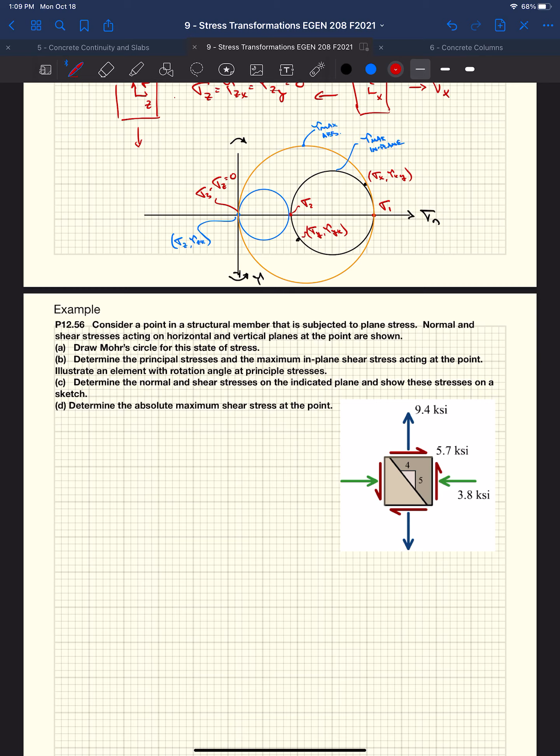Even more specific. Two, four, six, eight, 16. You made it. That's impressive.

Okay, welcome back. We're over halfway. You guys have done half the homework, half the quizzes. Essentially 25% of your final grade has already been spoken for, right? Half the quizzes you took. Each quiz is worth 5%. Homeworks are what? 30%? So 3% apiece, or 15%.

So we're getting there. We're going to continue with Mohr's Circle, hopefully finish that up today, and then we're going to start a review of what, I'm assuming, Chris Allen went through with you for statics. Hopefully Chris went through this with you, okay? What we're going to go through next with respect to beams is just a little refresher as we get into beam bending and moments and shears and shear lag and shear transfer and things like that, and stresses. So hopefully get everybody on the same page. But we're going to finish up Mohr's Circle.

So you have homework due on Friday. It's all about Mohr's Circle, right? So I need to quiz you on Mohr's Circle. That's going to be quiz number 6. It seems not cool to give you a quiz that's due on Sunday when the homework's due on Friday. Is anybody opposed to me opening up the quiz through Monday? Or are you guys just going to procrastinate anyway? You're going to do it Monday no matter what. All right, so I'm going to open it up. It'll be open noon on Friday through Monday at midnight, okay?

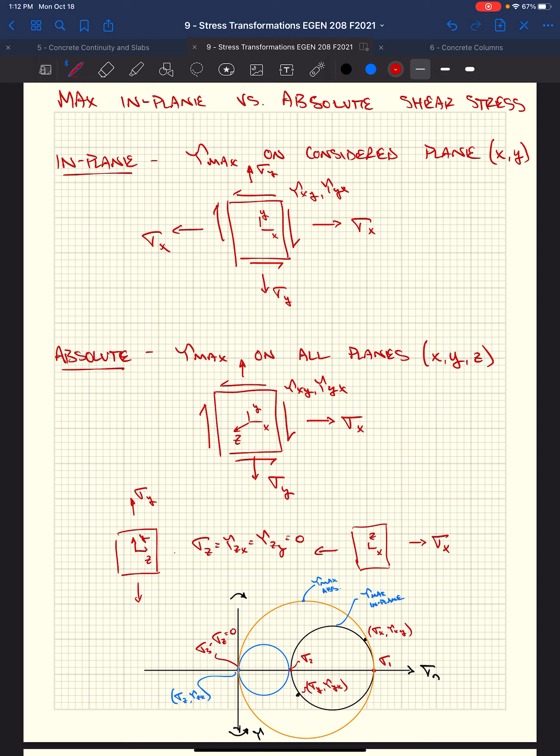Anything else? Nope. All right, so Mohr's Circle. We talked about this idea of max in-plane versus absolute shear stress and the difference between them, right? I had my box, which someone thought was garbage and threw away, I guess. Right, but we live in a 3D world and there are real stresses. There it is, and it slants a little bit.

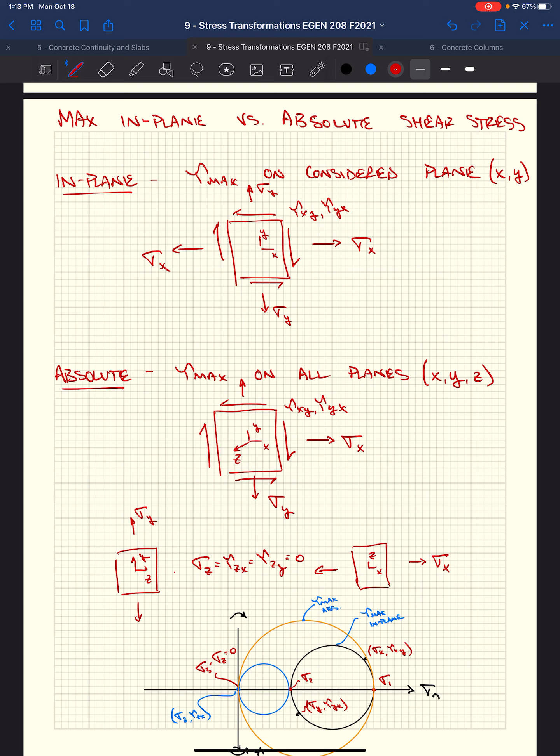Right, 3D world, we've got this stress block. We assume plane stress, so we're only looking at these 4 sides of our 6-sided cube. Well, in reality, we've got 6 sides to this cube, and even though we start by saying we have no stress on the front and back, the z faces of this cube, the fact that we have 0 stress on the z faces actually results in a Mohr's Circle for all 3 of our stress blocks, the xz, yz, and the xy. Plotting all of them together, we can get situations and conditions where we have even larger shear stress, right?

So if our principal stresses in the xy plane created this black circle here, once we consider the fact that we're in plane stress and we have this 0 normal stress acting on the faces that are facing us, we get a principal stress here at the origin, and so we end up with this larger circle, which creates a larger absolute shear stress, okay? We just want to keep that in mind.

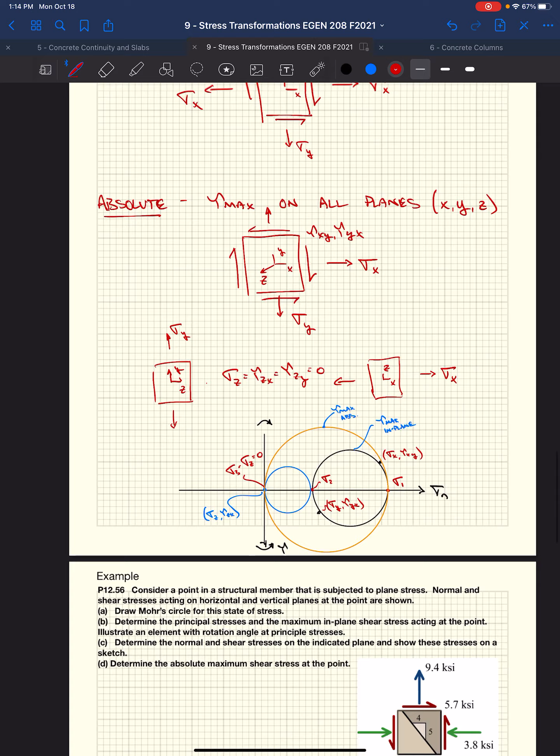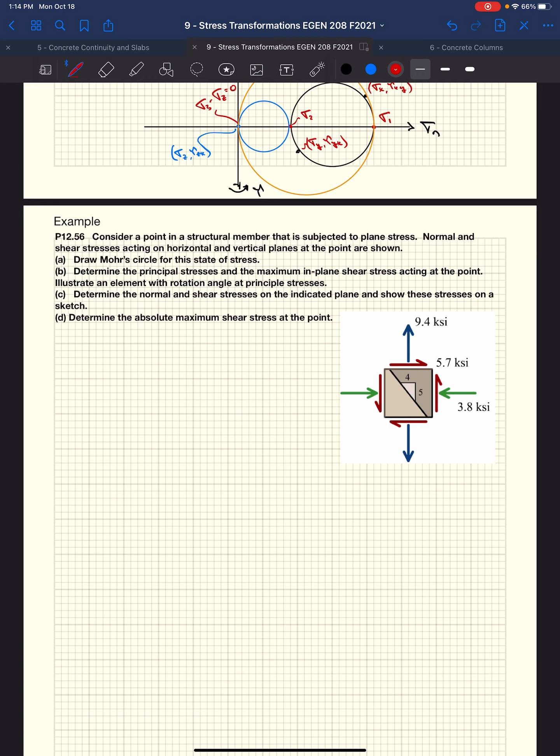Okay, so we're going to do a couple more examples. I think examples are key on this concept. So we have a point in a structural member subjected to plane stress. We know that that is a very reasonable assumption to make. We've already gone through, or someone has gone through, and established what the stress is acting on the horizontal and vertical planes of this element, oriented as shown. They want us to draw the Mohr's circle for this stress state, essentially plotting our points, drawing the circle, finding the center, finding the radius, right? We've done all of those things already. You're doing that in the homework.

We want to determine the principal stresses and the maximum in-plane shear stress acting at the point, and we want to illustrate that on an element that's rotated at that angle, right? Because we know that these aren't the principal stresses, because if they were, we'd have no shear stress. So we're going to have to rotate this some amount to get to the maximum points on our x-axis, sigma 1 and sigma 2.

They also want us to determine the normal and shear stresses at the plane indicated. So we want to know what's going on this plane. What normal and shear stresses are acting on a cube that's oriented parallel to this plane? A four to five triangle here. Then they want us to draw that on a sketch. And lastly, they want to determine the absolute maximum shear stress at the point, right?

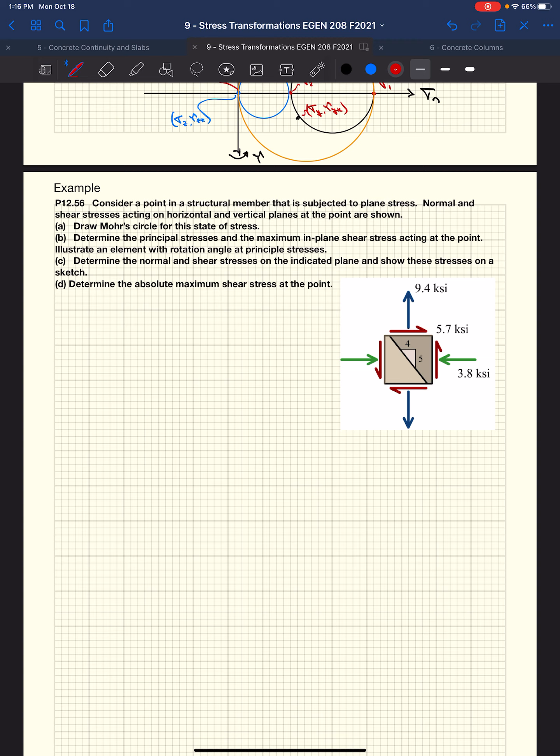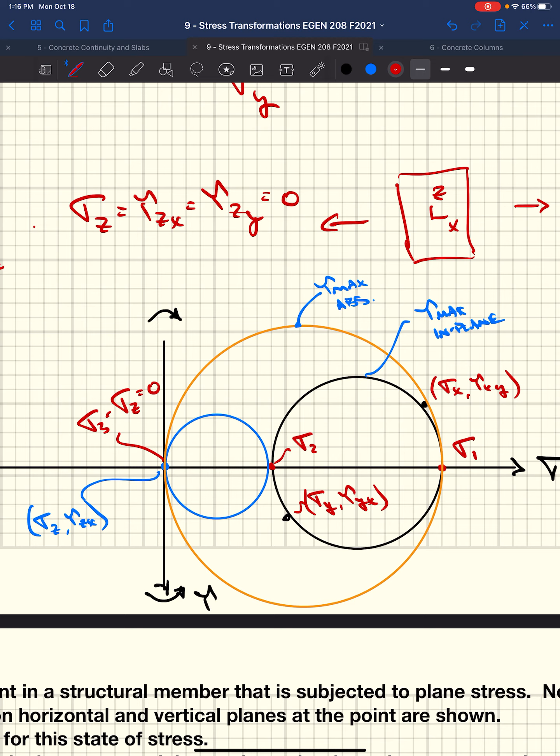Absolute maximum. So we want to make sure that we consider the fact that we have normal stress in the z direction of 0, and that may affect our Mohr's circle and our absolute maximum shear stress. But sometimes our in-plane shear stress can be the maximum. In-plane shear stress is maximum when our principal stress on the y side is either 0 or negative. Essentially, if we encapsulate the origin within our in-plane circle, then our two other circles are actually inside our xy circle. So our maximum absolute shear stress is our maximum in-plane shear stress. Those two are the same. Okay.

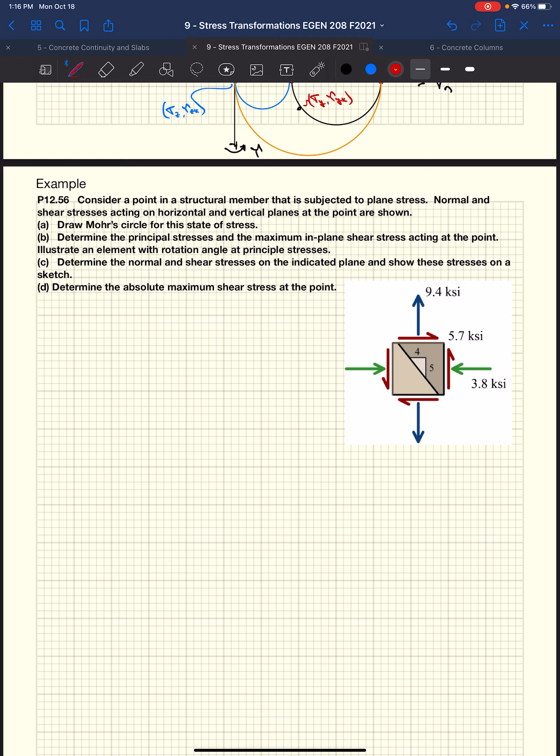I wasn't going to give this to you, but I'm going to, because I'm being lazy and we need to move forward. Okay, so in this example, here is Mohr's circle. I was going to draw it out, but we need to move ahead. This is three pages down in the skeleton notes. This is a computer-generated Mohr's circle, okay?

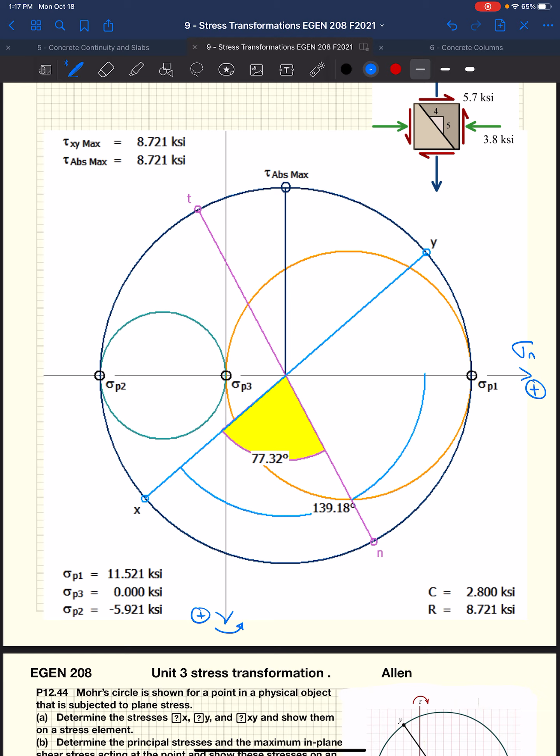So we have the indicated stresses on our stress block. On the X face, we have 3.8 KSI in compression and 5.7 KSI in shear. If we were to plot those points, compression is on the left side. This is our normal stress; to the right is positive, positive being tension. We also consider shear stress downward positive, at least that's the way the axis is drawn, with a counterclockwise shear stress on the bottom side of the axis and a clockwise shear stress on the upper side. Based on that sign convention, 3.8 KSI in compression and 5.7 KSI in shear, which is counterclockwise here.

So this is our point, our X face point. We would plot this on our diagram or graph. Then we need to plot our Y point. It's 9.4 KSI and 5.7. In this case, it's clockwise for our shear stress and tension for our normal stress. So we're way up over here, right?

Now that we have both of those points, we're going to be really interested in a couple of things. We want to know what the radius is. If we know the radius, that helps us provide a known stress state at any point around this circle. We also want to know what the center is, so that also is a critical point to help us figure out all of the points around Mohr's circle.

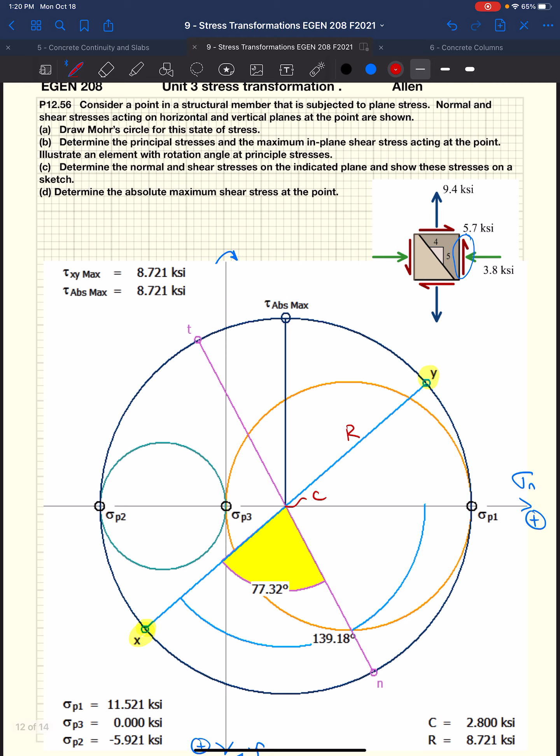So if we wanted to know what the radius is, I'm going to jump back up here, just so I didn't have to draw it and you guys didn't either. We know the radius is the square root of the x normal stress minus the y normal stress over 2, squared, plus the shear stress squared. In this case, 8.72 KSI. Pretty easy, plug it in, right? Negative 3.8. Make sure we maintain our signs. Negative 3.8, because it's compression, minus 5.7 divided by 2 squared, plus our 5.7 squared. Or sorry, 9.4. So we get a radius of 8.72, as I mentioned.

Always good to know what the center is. Well, the center is our average stress. That is sigma x plus sigma y over 2, or negative 3.8, following the sign convention, plus 9.4 over 2. We get a center point of 2.8 KSI.

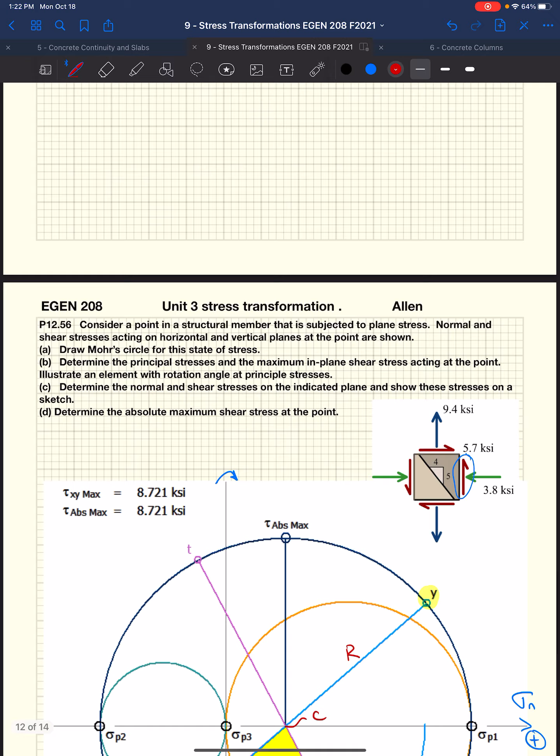So if we go back down to our drawing here, the radius in our case is 8.72 KSI. And the center point just has coordinates. The coordinates are the average stress, comma 0. Average stress being 2.8 KSI, comma 0 KSI. 0 shear stress, the center is always going to be where it crosses the x-axis, so we have 0 shear stress. So 2.8 comma 0, that's our coordinate for the center. And that would be our Mohr's circle, right? So that would be the answer to problem 1.

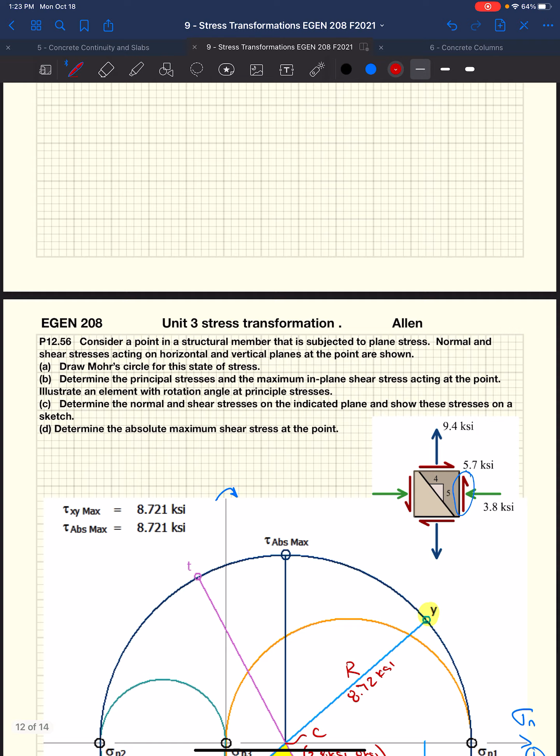So now they wanted us to determine the principal stresses and the maximum in-plane shear stress acting at the point and illustrate that on a little diagram. Well, let's go back up here. We'll call this A, and we'll say B.

So if we want to know what the principal stresses are, we know the principal stresses are where we have 0 shear stress, right? So we're trying to get to where the circle intersects the x-axis on either side. P1 is going to be sigma max. We have the center plus the radius. Well, that's 2.8 we decided was our center, plus the radius was 8.72. We get sigma max equal to 11.52 KSI.

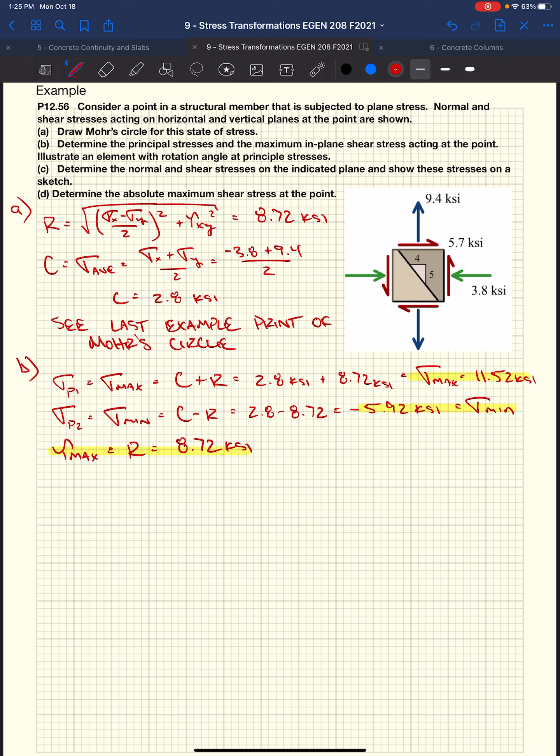Then they asked us to illustrate an element with a rotation angle at the principal stresses. Well, if we start by looking at a stress block, we have our initial stress block or stress state. We had our shear stresses. Normal stresses on the Y face were in tension. X face was compression.

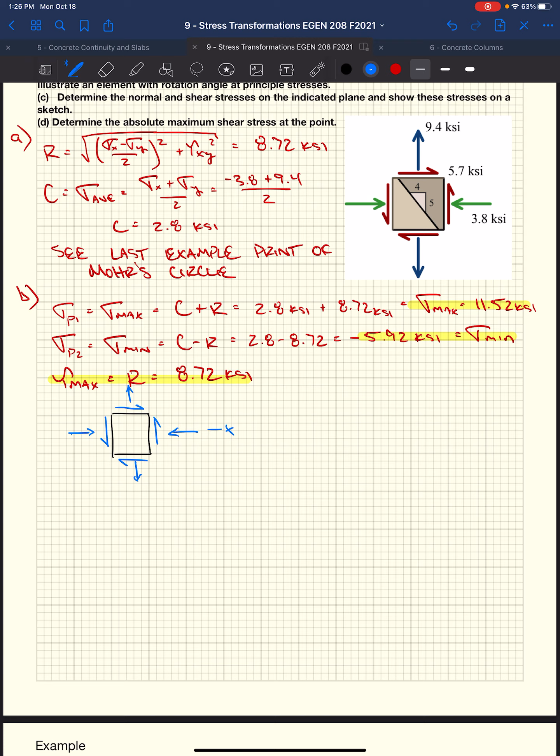Well, if we go back to our Mohr's circle, this was our initial stress state. To get to our principal stresses, we could either rotate all the way around this way or rotate back this way. If we rotate all the way around this way, the principal stresses are just going to act at 90 degrees to one another from being the other way. It's just which face they're oriented to. So I'm going to rotate this Y back down to the x-axis. I'm going to transform our Y face into this sigma P1, which is our maximum normal stress. So I really need to know what that angle is. If we called this angle alpha, alpha P for the principal axis rotation.

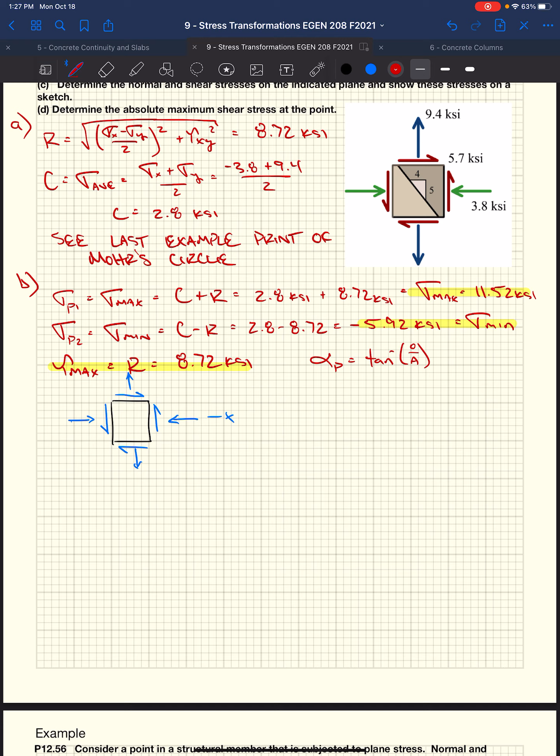There we go. All right, so we need to know what alpha P equals. Well, alpha P equals the inverse tangent of the opposite over adjacent, right? If we go back and look at our inverse tangent, this will be opposite over adjacent. So we need to know the magnitude that the Y point is above the x-axis. Well, that's easy. That's our initial shear stress, right? The adjacent, well, that's the normal stress that's beyond the center, right?

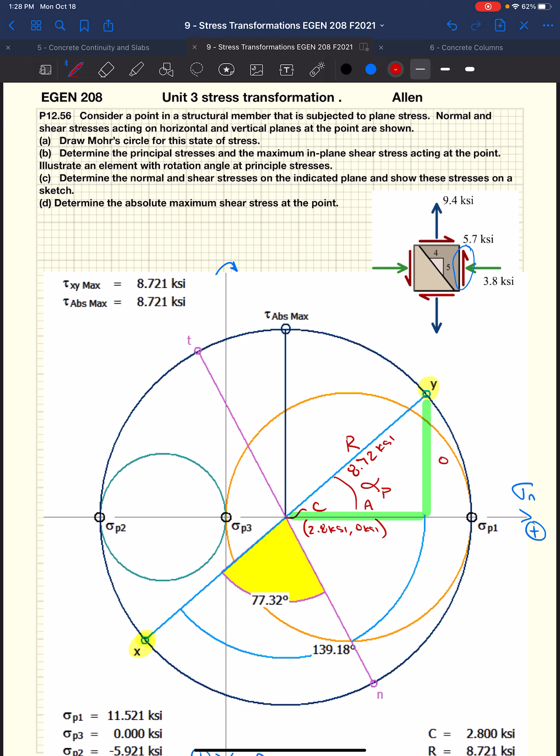So we would essentially need to grab this coordinate, which is 9.4, minus the center coordinate, which is 2.8, and that'll give us our adjacent, right? And then we can do our inverse tangent. So we know that this is the inverse tangent of 5.7 over 9.4. That's our x coordinate of our y point, minus the center, we know we have to take away the center in order to get that adjacent leg. If we do that, we get a sigma p or alpha p of 40.8 degrees.

We also know that that's in Mohr's circle world, right? Mohr's circle world is twice that of the real world. So if we rotate 40.8 degrees on Mohr's circle, we really rotate half in the real world. So theta now equals 20.4 degrees. So this stress block, in order to figure out what the planes are in which we get our principal stresses, we need to rotate this block 20.4 degrees. And then the sides of that rotated block are going to have our principal stresses, right? The maximum normal stresses we're going to see in our block.

So I will just draw a line like that. Right, this is 20.4 degrees, because I rotated down. There's my stress block. Those are my axes, right? We had a Y face and an X face, like we had in our normal block. Now those have rotated down, as you can see there.

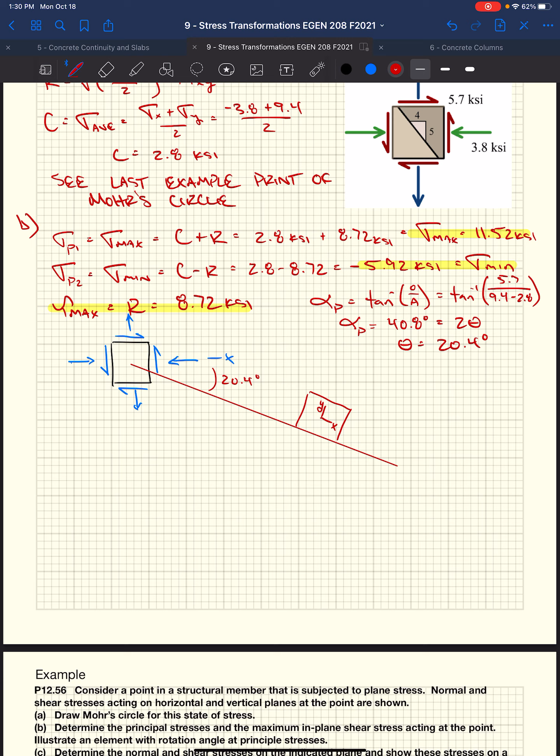Well, now if we look back at our circle, it's our Y face that's going to have our maximum tension stress, right? And our X face is going to have our minimum stress, which is actually a negative stress. So I just want to make sure that I populate the stress block right. So the X face should actually be negative. What does that mean? That means it's in compression. So 5.92 KSI. And then our Y face, well, that's our sigma 1 or our maximum principal stress, which we decided was 11.52 KSI. And that's part B.

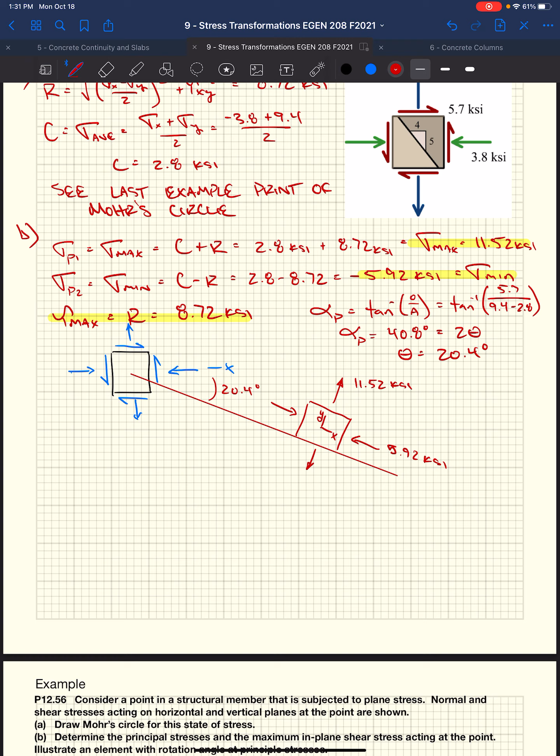We figured out the maximum in-plane shear stress, 8.72. We figured out what the maximum principal stresses were, and we drew a block that indicated the planes in which those stresses act. Right? So if we took whatever material this was and sliced it at a 20.4 degree angle, this face here would have 5.92 KSI in compression. It'd be the worst case compression stress. If we sliced it 90 degrees from that, we would get the worst case tension stress, or the maximum stress.

Part C, they were specific in asking us to look at what are the normal stress and shear stresses on the indicated plane, and show them on a sketch. So obviously, in the real world, you would be able to analyze an existing condition, right? Like we've done before with external forces. We got shear stresses for a stress state. Now, obviously, there's a plane of interest in this material or this element that they want us to know what are the stresses acting on that plane. Maybe there's a connection that's oriented in a 4 to 5 triangle. Maybe there's a weld that's welding two pieces of steel together at this angle. And we want to know exactly what the stresses are acting across that joint so we could design that or at least check its capacity.

Well, first thing we want to know is, what is that orientation? What is that theta, right? We have an orientation here. We want to know what's the new orientation that we're trying to figure out these stresses. So theta, a lot of inverse tangent here. I know you guys love trigonometry here.

In order to get that angle, we could use the inverse tangent, opposite over adjacent. Opposite being 4, adjacent being 5. We can figure out that angle is 38.66 degrees.

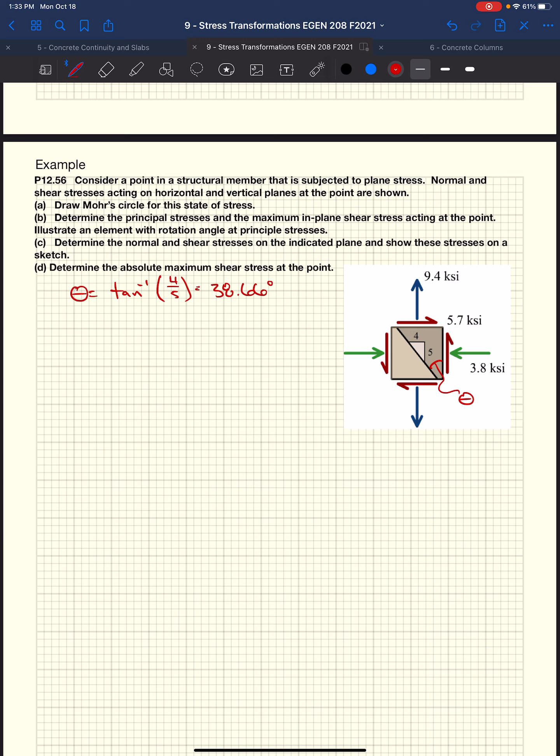Well, knowing that we're now going to be rotating this counterclockwise 38.66 degrees, this is where we can go back to Mohr's circle that we've already established for our known stress state. We've got our two points, and we know that now we need to rotate 38 degrees to the left to figure out the two new points, because these are going to be our stress states on the x and y face, or this face and a face perpendicular to it of that element.

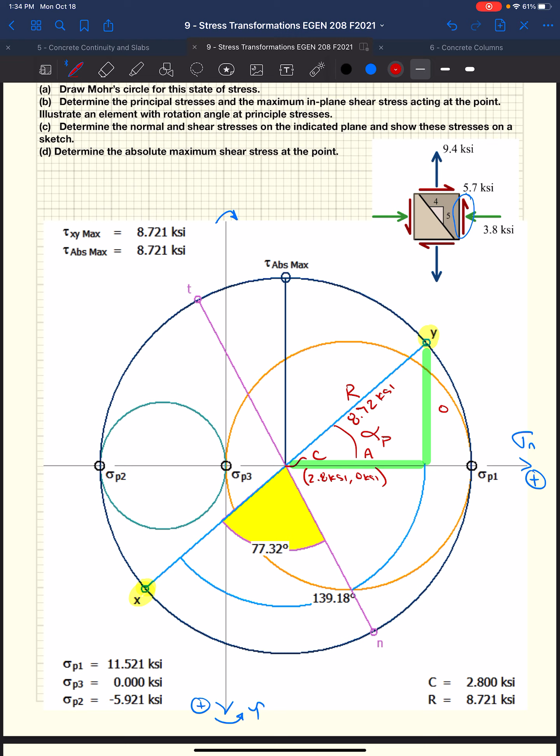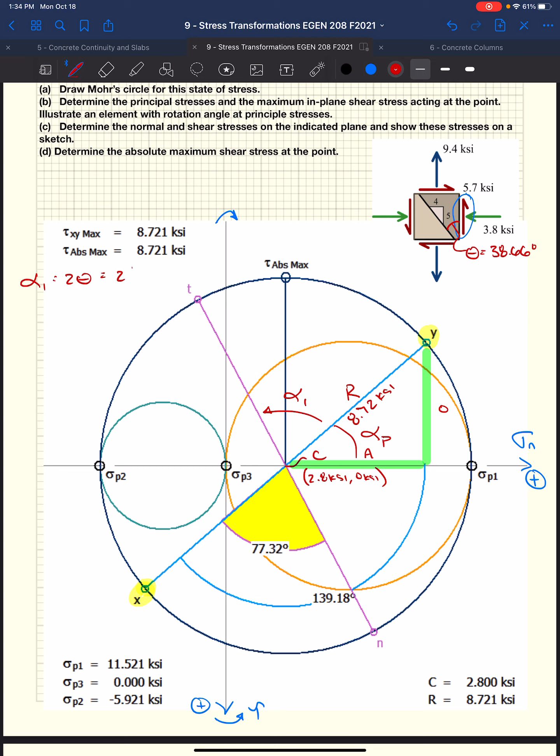So we're going to rotate and call that alpha 1. Well, if theta was 38.66 degrees, we know that alpha 1 equals 2 times theta. If in the real world we're going to move 38.66 degrees, on Mohr's circle we have to rotate twice that. So we take 2 times 38.66 and get 77.32 degrees. So alpha 1, how far we're going to rotate, is 77.32 degrees.

Well, if we know alpha 1 is 77.32 degrees, we really want to find these legs of our triangle. We're trying to find coordinates on this circle. We know the radius and we know this angle here, so these coordinates would be really easy: sine and cosine of that angle times the radius. Based on Mohr's circle, we know the principal angle, which we've already established, and we know from x-axis around to x-axis is 180 degrees.

So this angle, we're going to call it beta. That equals 180 minus alpha 1 minus our principal angle. Our principal angle we know was 40.8 degrees, and we know alpha 1 is 77.32 degrees. So beta now equals 61.88 degrees. And the rest of it just pops right out. Now that we know the radius and we know what that angle is, we know what those coordinates are.

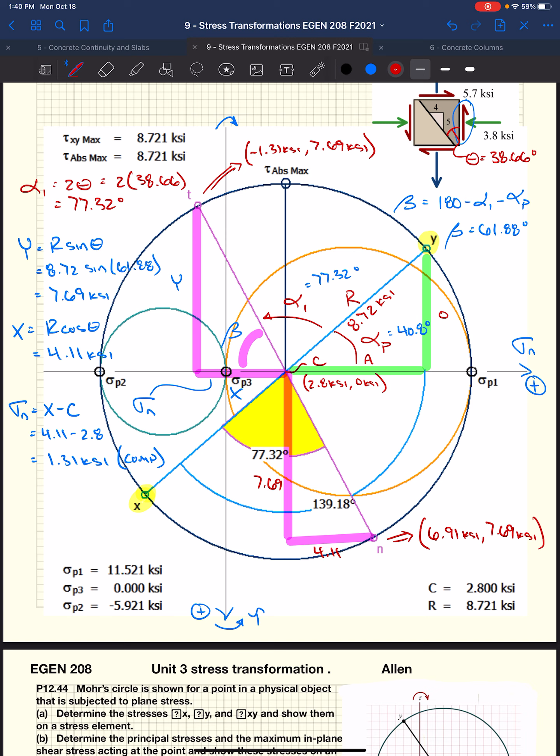All right, we're not done yet. We have to take those values, and they asked us to put it on a sketch. So we're going to go back up here and start with part C: they want to determine the normal and shear stresses on the plane and show these stresses on a sketch. Based on this rendition, we're rotating counterclockwise 38.66 degrees, so we're going to take this block and rotate it that far to the left.

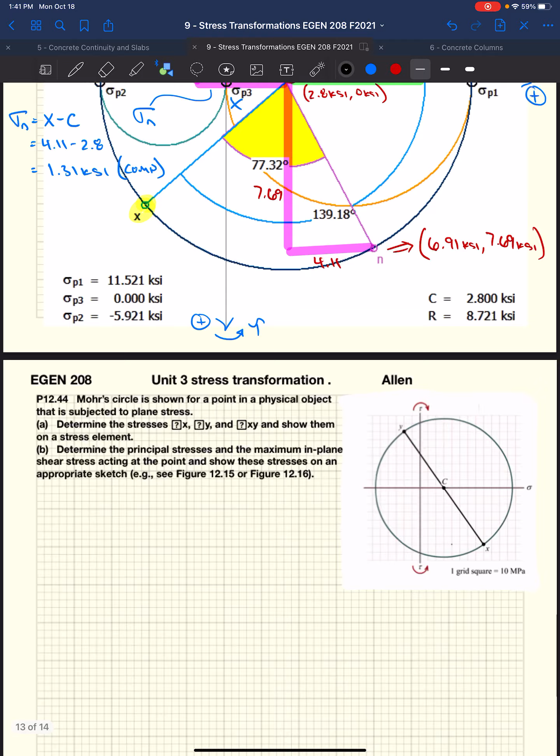I keep going the wrong way. I'm going to do something like this. I'm going to say that this is theta, which is 38.66 degrees. This is the rotation that we've decided we want to orient one of the sides of this stress block, so we can figure out what the stresses are via Mohr's circle and transforming the stresses. So now our block is going to sit something like that.

Well, our sides are still oriented like they were, right? So this is our X face, this is our Y face. If we rotate it counterclockwise to the left, this is our X face, that's our Y face. We're going to maintain that. So this is X, this is Y.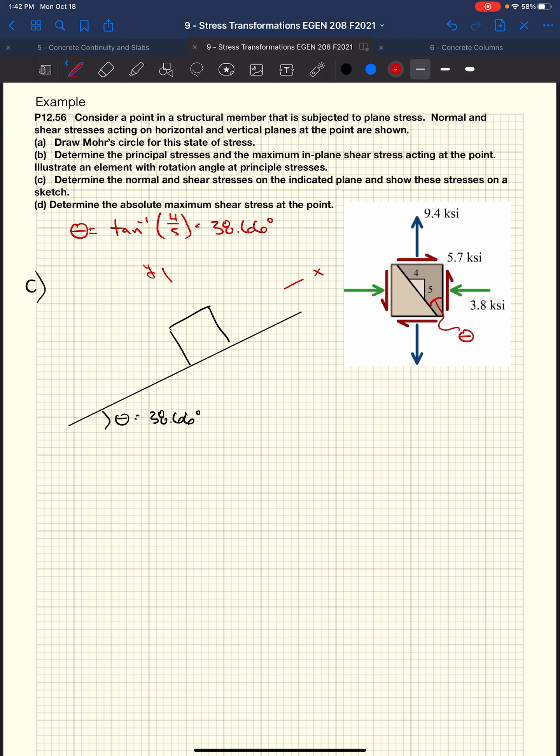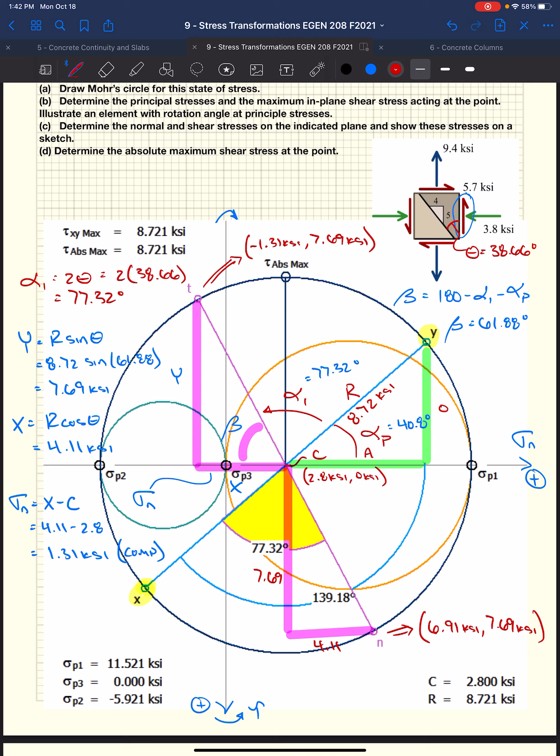So based on that, we took the Y and rotated it. If we start by looking at the Y face rotated over, now we have the Y face in compression, 1.31 KSI, and then a clockwise shear stress. Clockwise shear stress, we know it's in compression, right? It's 1.31 KSI of compressive stress to be exact.

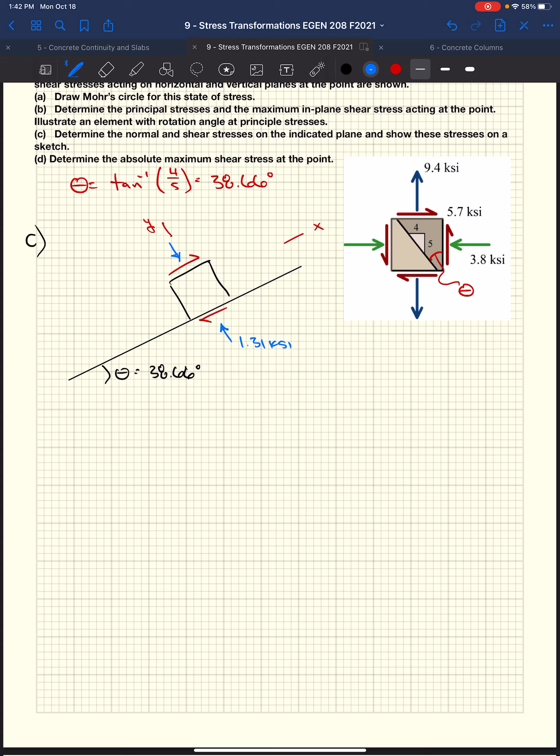And then on the other side, we took the X face, which was originally in compression, right? 3.8. It rotated down past the Y-axis, so now it actually started getting into tension all the way up to our rotated point. So now we're in tension. We get 6.91 KSI, and our shear stress, tau XY and tau YX are the same, equal and opposite. We get 7.69 KSI.

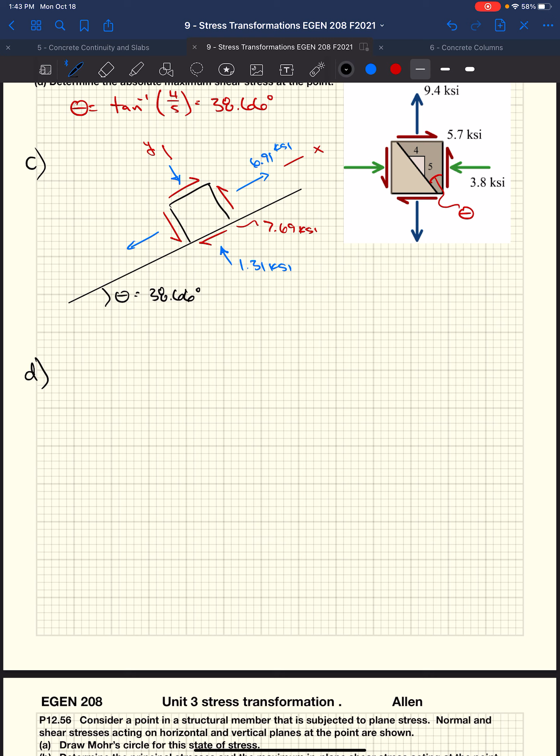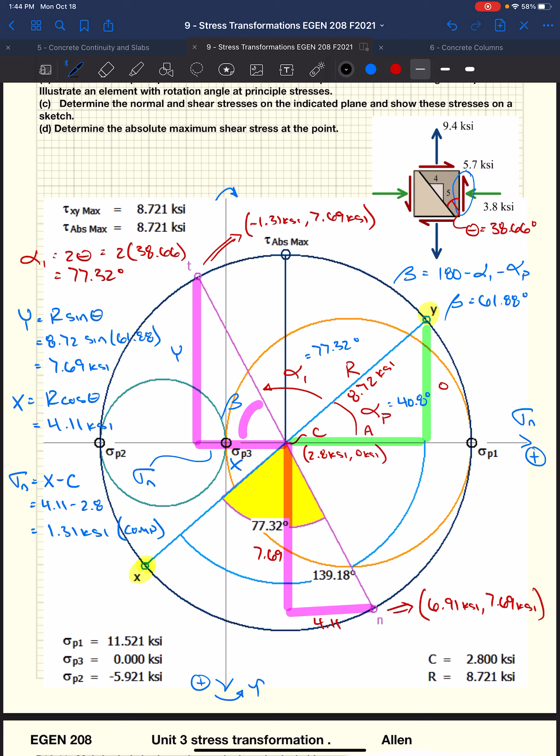All right, last part of this example. They asked us to determine the absolute maximum shear stress. Well, we know based on this Mohr's circle, if we were to draw in our two additional circles based on our principal stresses, sigma 1, sigma 2, and sigma 3, our XZ and our YZ circles land within our XY circle. So this is truly the ultimate shear stress, both the maximum in plane, but also the absolute maximum shear stress that you would see in an element.

So you could say tau max in plane equals tau max absolute equals the radius, which is 8.72 KSI. Right? What's that? Is that what you need?

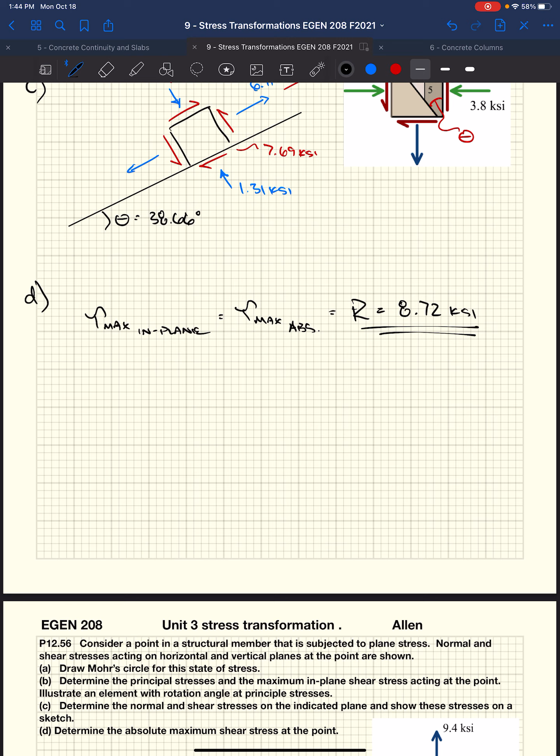No, so that's what I'm saying as we went through before on Friday, is that if you have this condition where we plotted our 2 points, we drew our Mohr's circle for our stress state, and we were off to one side of the origin. If your 2 principal stresses are either both in tension or both in compression for your in-plane Mohr circle, then that means your principal stress in the z direction is outside your circle. And if it's outside your circle, when you draw a circle from that principal stress to your other 2 principal stresses, you're going to get a larger circle. And because you get a larger circle, that absolute maximum shear stress is going to be greater than the in-plane shear stress. They can either be equal or the absolute's going to be greater.

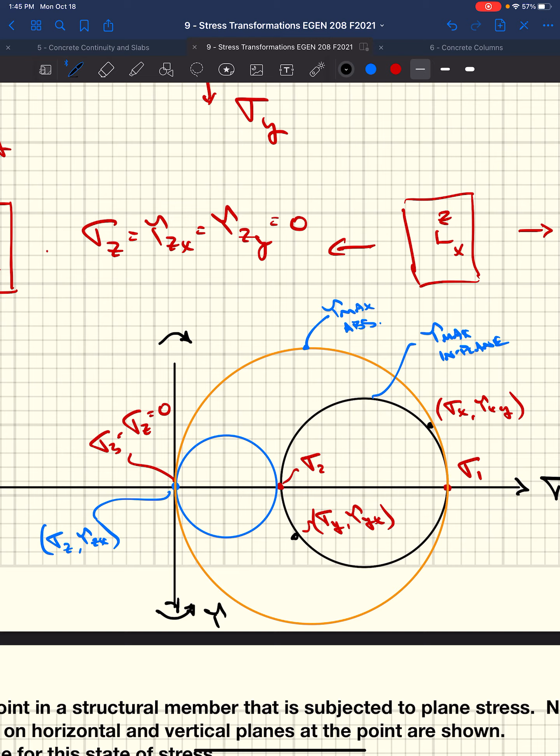In our case here, they were equal because our initial stress state was on either side of our origin. You had a tension and compressive stress. If you do that, then this 3rd point is in the middle of your circle.

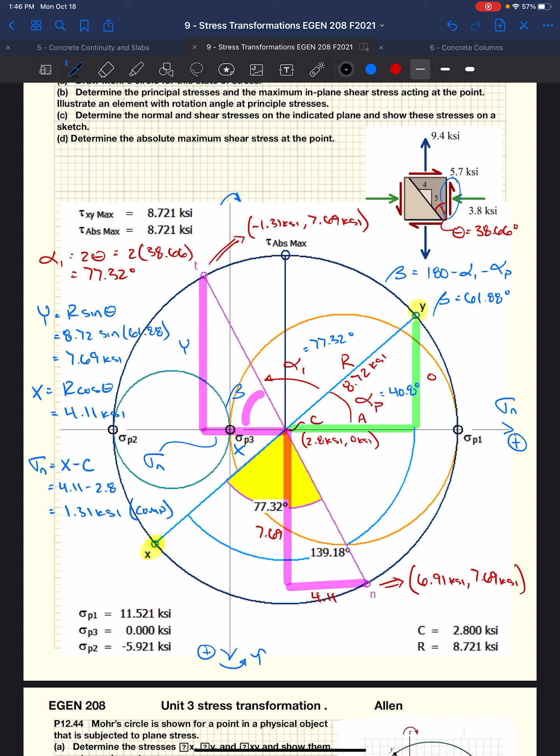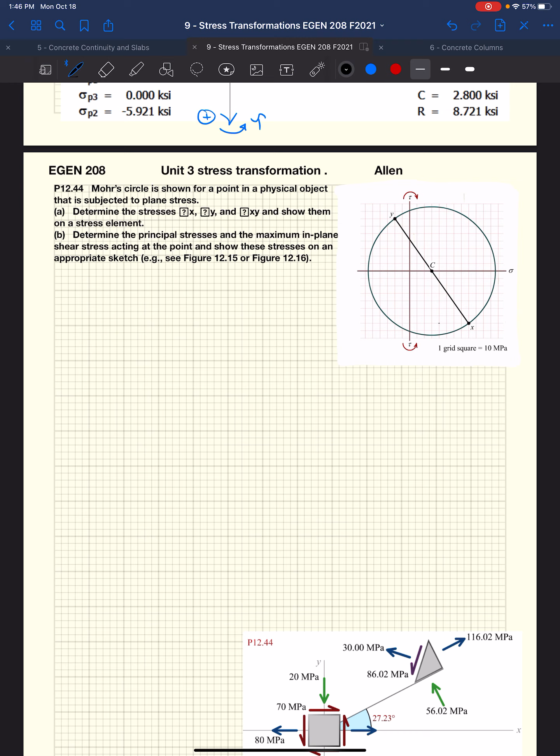All right, more examples. Gotta get moving. This is very similar to the homework, where we're actually given a Mohr circle for a point in an object. It's undergoing plane stress. They want us to determine the stresses and show them on a stress element. And then they say, determine the principal stresses and the maximum in-plane shear stress acting at the point and show these stresses on an appropriate sketch.

Well, that's easy. If we wanted to establish what the stress state is, we just need to know these coordinates, right? Coordinates of x face and y face, they're already labeled as their x point and y point. They gave us the scale here, which also in the homework, they give you the scale. So 1 grid square is 10 megapascals. So you just count them up, and we want to establish what our coordinates are.

So if we establish our coordinates, our x face is going to have a coordinate of 80, comma 70. Y face is going to have negative 20, comma 70, right? And I guess this bottom being positive is technically, in order to get a legitimate coordinate, negative 70. So those would be the stresses at each of those faces.

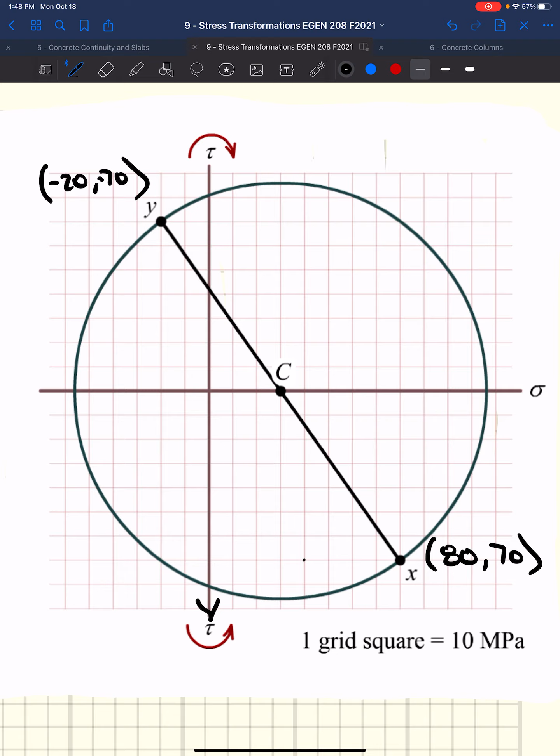So based on that, knowing Mohr's circle, counterclockwise shear on the bottom end, clockwise above the x-axis. Normal stress is positive or in tension on the right-hand side of our y-axis. They want us just to draw this stress state, right? So we draw a stress block. We know that our x face, if we drew it, this was x, this was y.

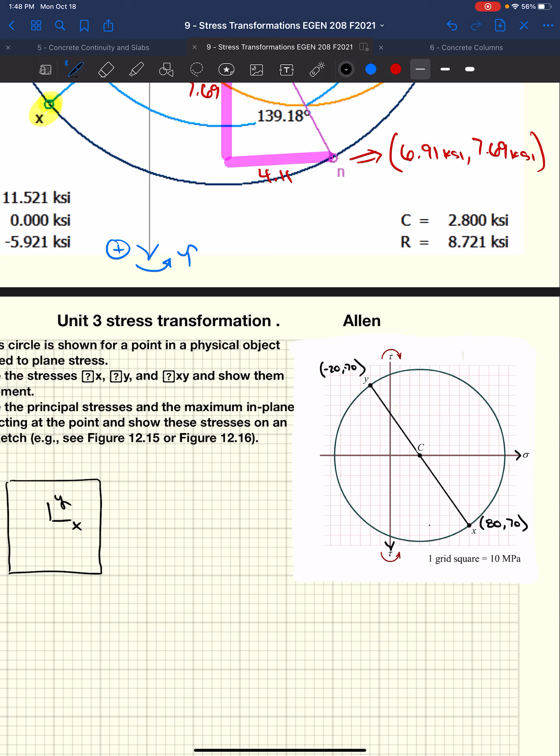Okay, our x face we know is 80, 70, so 80 megapascals of normal stress, positive being tension. So we're going to say we have 80 megapascals. We have 70 counterclockwise megapascals for our shear stress.

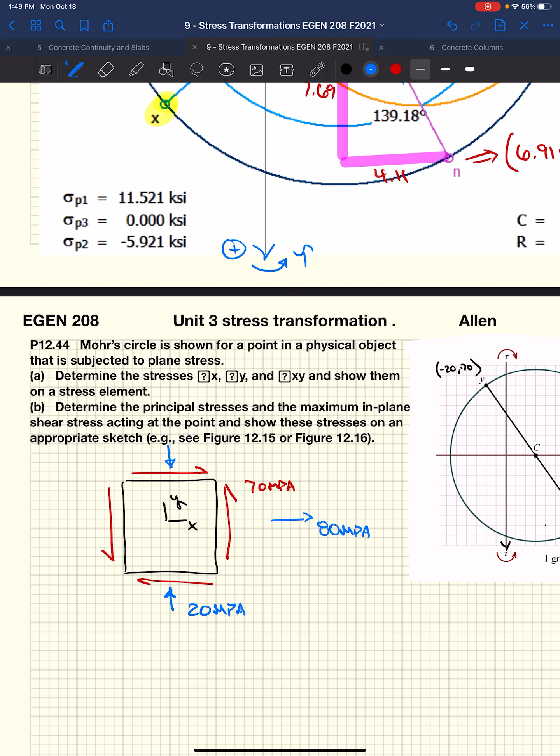Well, if that's counterclockwise, we know that on the y face it's got to be equal and opposite. So it's clockwise 70 megapascals. We also know that the coordinate for our y point was negative 20. Negative 20 meaning compression. So we have 20 megapascals in compression. So if we're given Mohr's circle and 2 points, given our initial stress state, we can back out what that initial stress state looks like, right? So that's part A. That's easy enough.

Part B, determine the principal stresses and the maximum in-plane shear stress acting at the point and show these stresses on an appropriate sketch. Okay. As I've been mentioning over and over again, the principal stresses and the maximum shear stress, those are the important ones, right? Those are what we're going to relate back to our material properties. So someone's going to give us what the failure stress is, right? The point at which our material is either going to yield or it's going to physically break, okay? Then we add some factor of safety to it, so we reduce those numbers to an allowable stress, and then we relate that allowable stress to the maximum stress that our element's going to see, right?

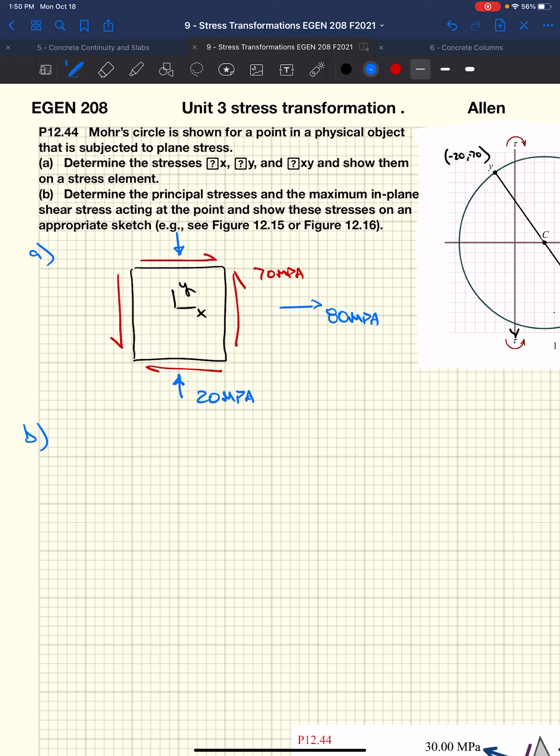And so if we were to just look at this initial stress state, we might have, say, an allowable stress. These might be within our allowable stresses, but when we go and look at our principal stresses, which are likely going to be larger, they might not be. So again, in order to find our principal stresses, we need center and radius, right? Those are the big ones.

That's our average stress. In this case, it's 30 megapascals. You could also scale it off of that if you really wanted to. Radius, 86 megapascals, right? Square root of the sum of the squares. Maximum in-plane shear stress. Well, we know that equals our radius. Well, that's 86 megapascals. Well, that was easy.

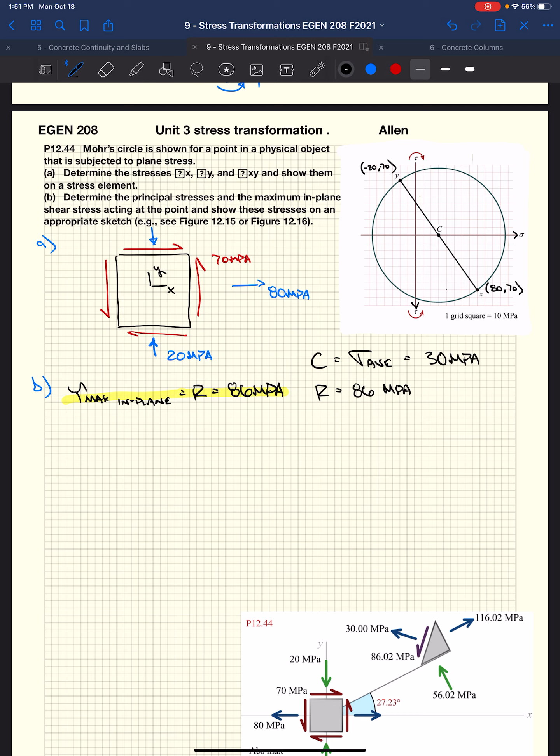Our principal stresses, those are pretty easy too, right? Our maximum stress, or our sigma P1, is really our center plus the radius. Well, that's 116 megapascals. Our second principal stress, which is our minimum stress in plane, is C minus R, right? Or negative 56 megapascals in this case.

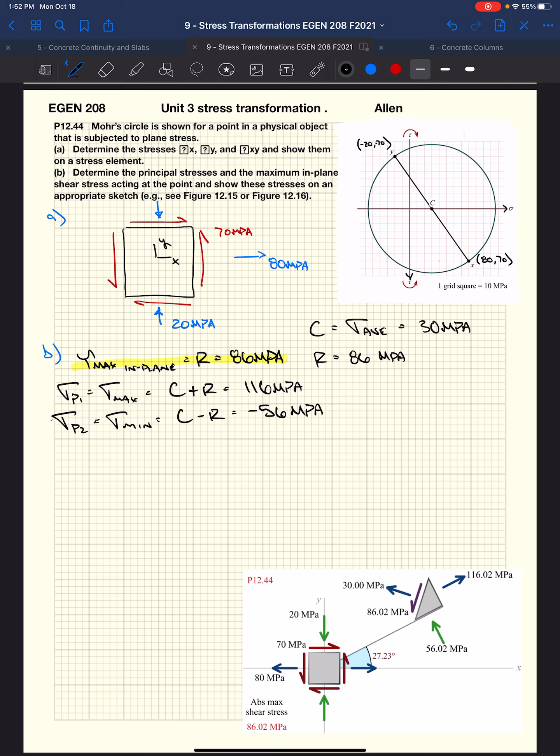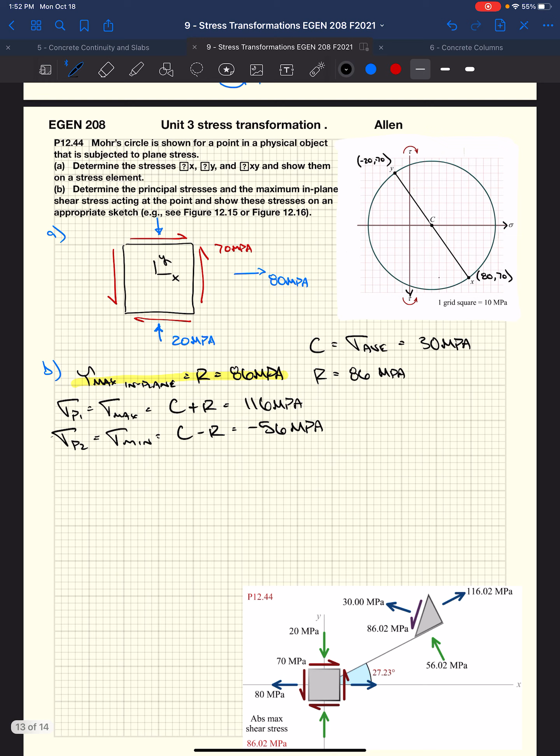We also need to know what this angle of rotation is, right? Because we need to know what the orientation is so that we can draw it on a stress block. So we need to know what alpha is. Well, we're all going to get really good at the inverse tangent, right? Opposite over adjacent. Woo! I'm going to get good at it too, I promise. All right, so opposite over adjacent.

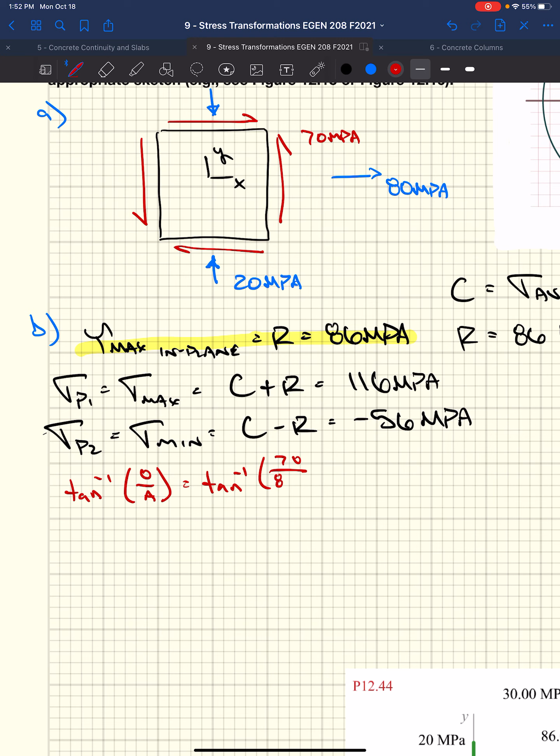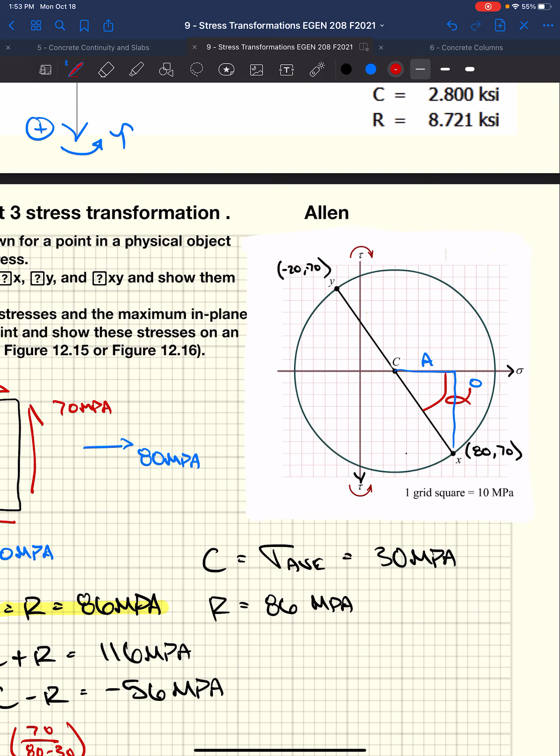In that case, we've got tangent inverse of opposite over adjacent equals the inverse tangent of 70 over 80 minus 30, right? We essentially took our x coordinate, the vertical leg, well, that's just our shear coordinate or our y coordinate. The horizontal leg, well, that's our total coordinate minus the center coordinate, right? Because 80 comes from the origin. Well, we need to come from the center in order to get our adjacent leg. So we get our adjacent leg.

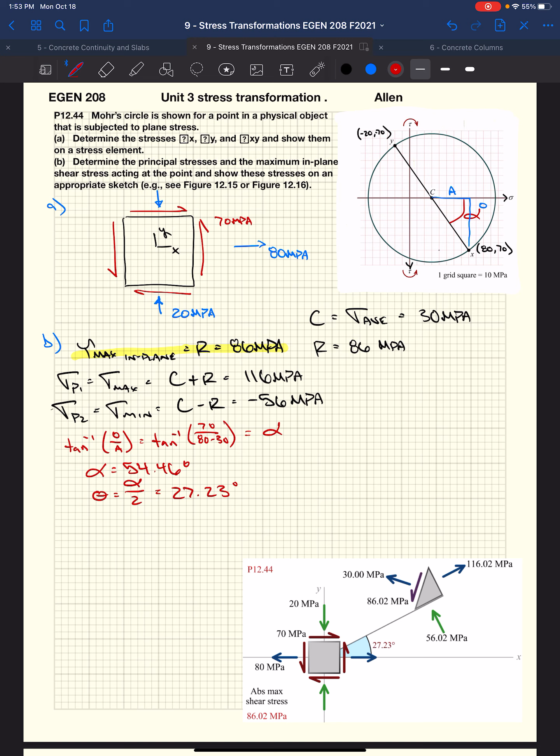This all equals alpha. Well, alpha equals 54.46 degrees. We know that there's a difference between the real world and Mohr circle world, right? So we got to divide that angle by 2 to get what the orientation of the actual stress block is. So we end up with this sketch. This sketch is important for the homework, because I referenced this example in the homework, okay? This is a sketch that I'm looking for in the homework. Okay. So we were given an initial stress state.

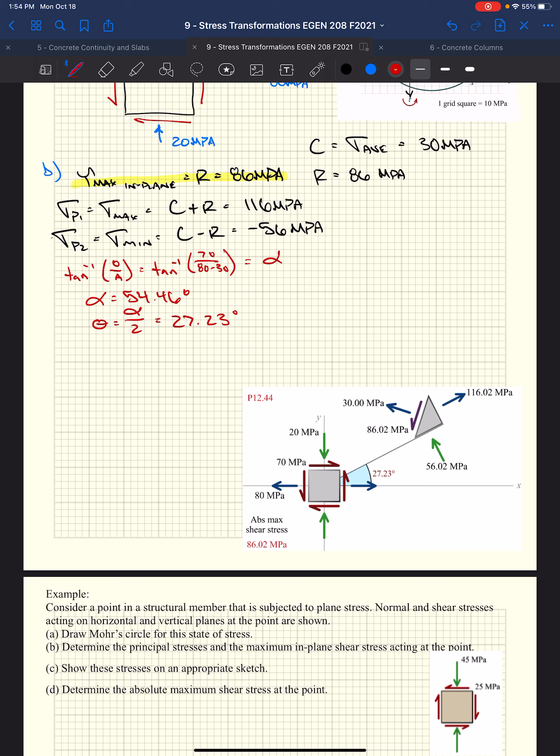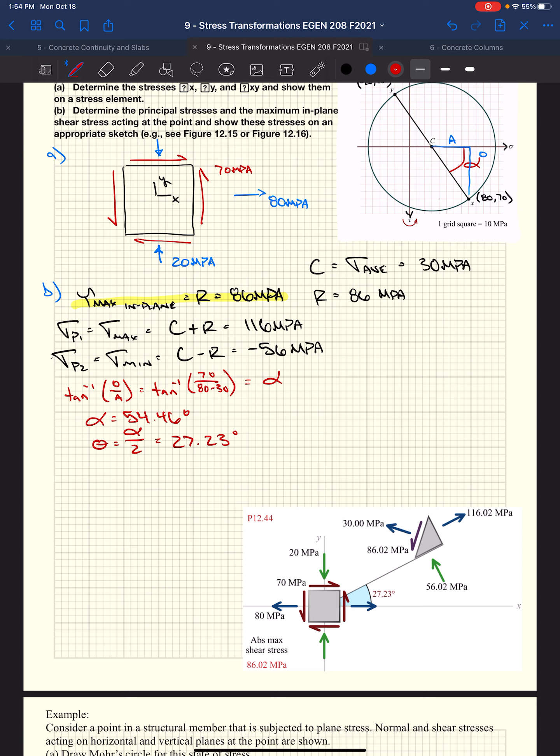Right? We backed it out based on this graph, but we could have been given this initial stress state, and then a depiction of what our maximum shear stress is and our maximum principal stresses are. Or our principal stresses, which are essentially maximum. We can draw it like we see it here. So we just determined that our theta angle was 27.23 degrees counterclockwise.

Okay? So we take our initial orientation. We have our initial x-axis. We need to rotate it. The angle we determined was oriented to the principal stresses. Then we orient our block on that angle, okay? And we know that on our X face, in this case, we have a maximum principal stress of 116 megapascals in tension. We have 56 in compression on our Y faces.

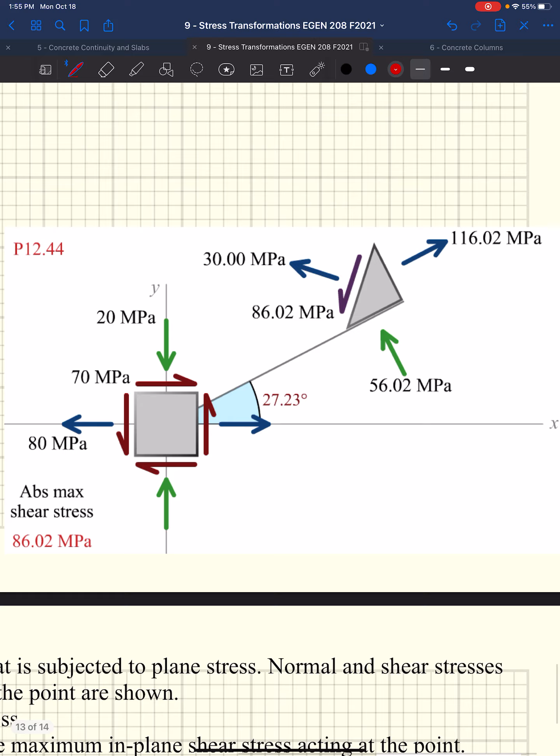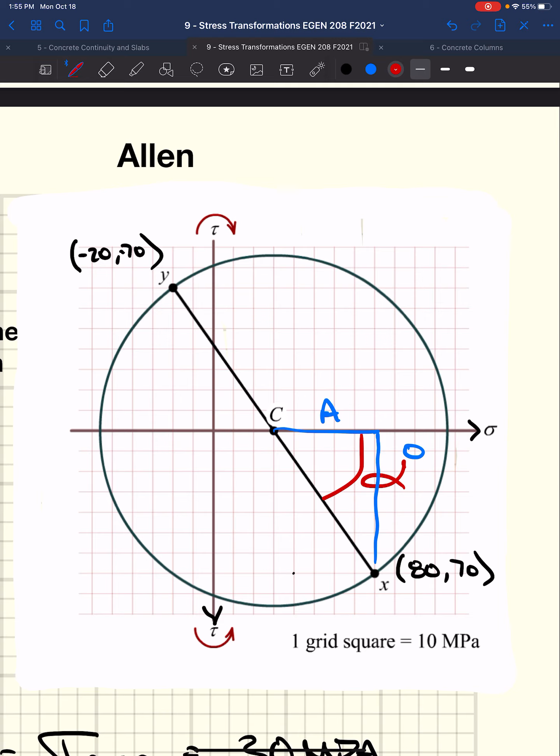Well, in order to depict the maximum shear stress: the maximum shear stress acts at 90 degrees to our principal stresses on the circle. Principal stresses are along our x-axis. Maximum shear stresses are along our y-axis, or a line parallel to it. The difference between those two lines is 90 degrees; in the real world, that's 45 degrees. So to depict both the principal stresses and the stresses acting when we have our maximum shear stress, we can just cut a line at 45 through that stress block. On that face, you're going to get your maximum shear stress and whatever associated normal stress.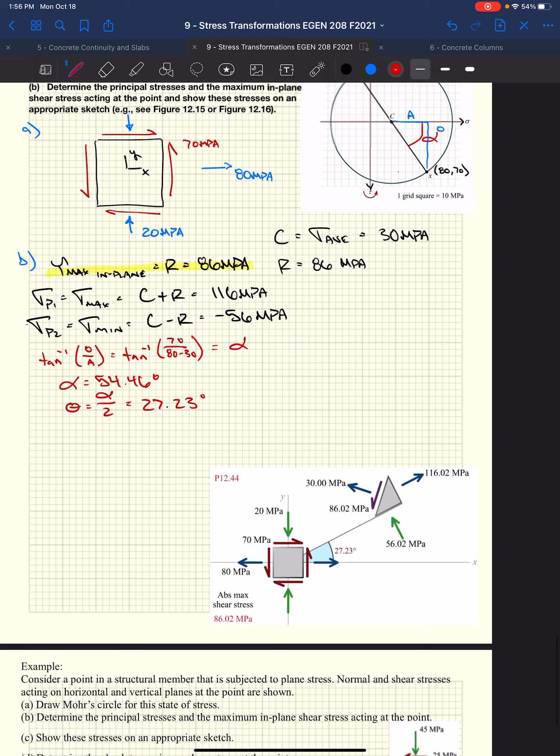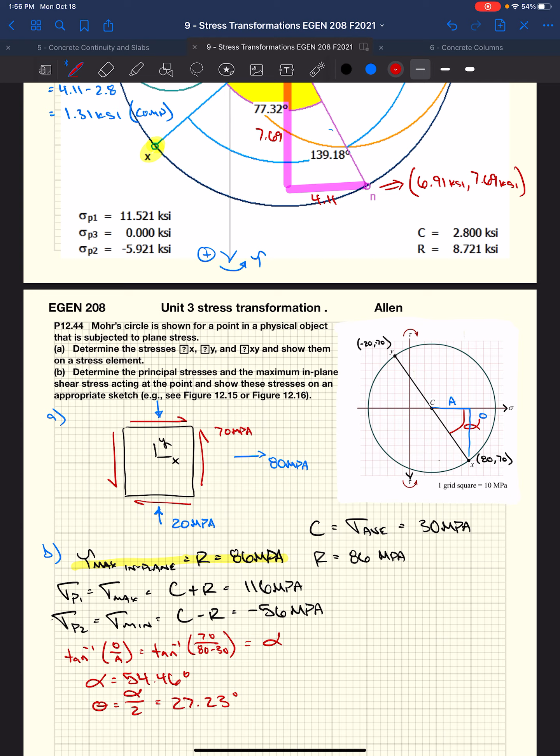So to get your radius, why can't you just use the Pythagorean theorem on your CX line with the 80 and 70? Just find the length of that line from C to X using your coordinates 80 and 70. It would be different, because you'd be taking this leg and this leg. The adjacent leg is the one that you'd be missing. You'd make it longer, so your theta would be up. Okay, I see that now.

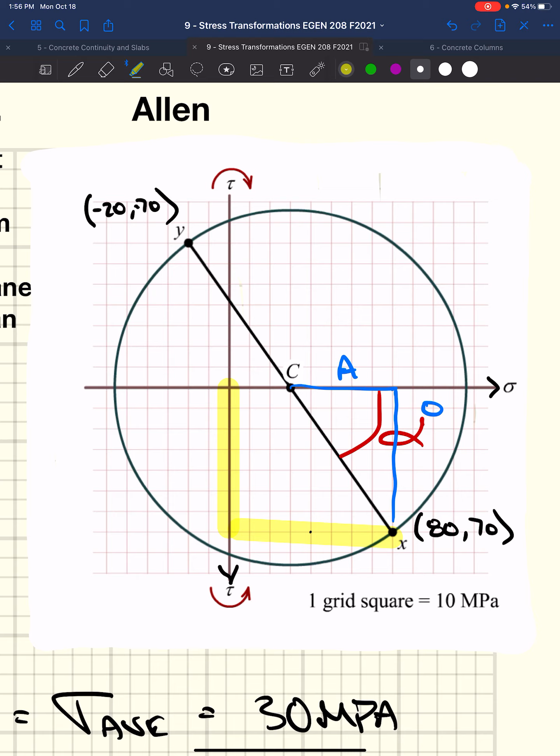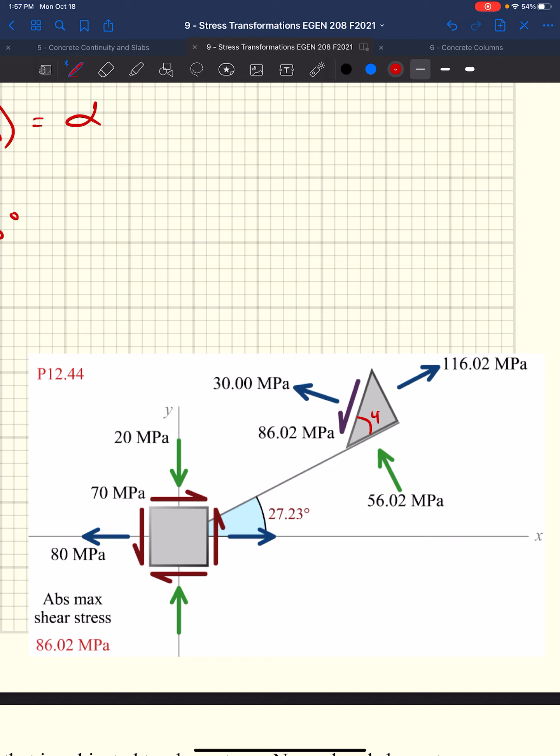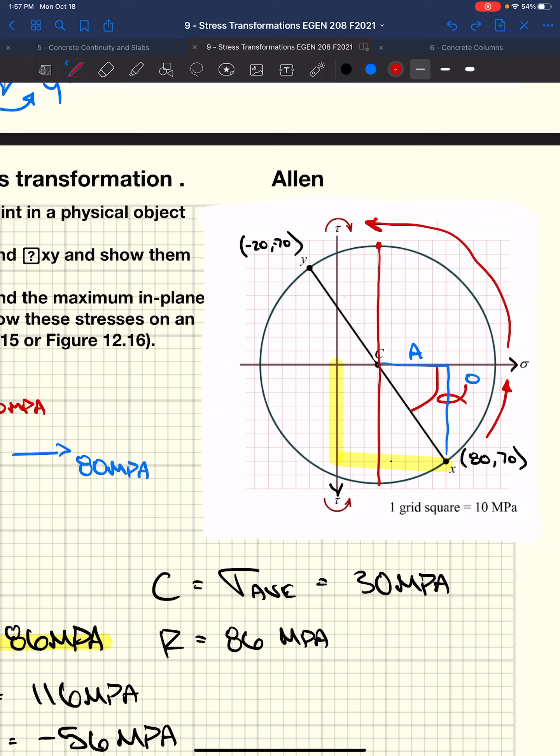Okay. Any questions there of how to draw that or why that works? We essentially rotated the 27 to get to our principal axis or principal stresses, and then we rotated another 45, which was 90 on the circle. So this is 45. And if we rotate another 45, which is 90 on here, we rotate up, and then we rotate up to this point here. And when we do that, we end up with that 30 of normal stress, and then our shear stress.

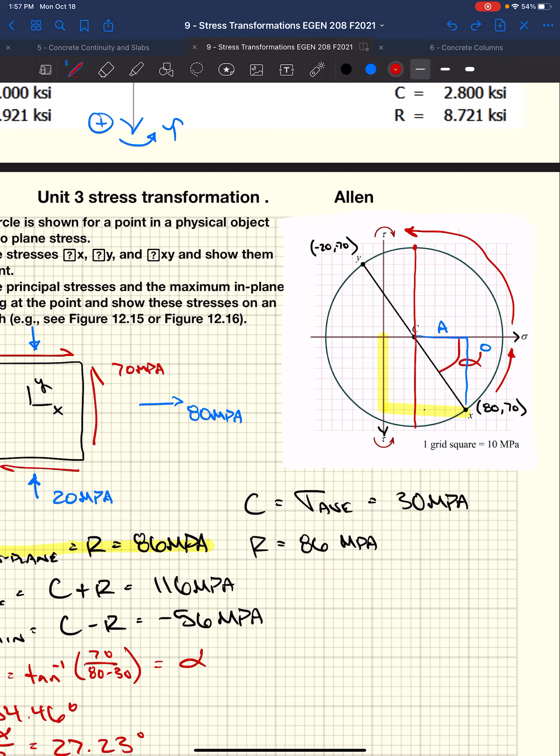All right, we're getting so close to being done with Mohr's circle. A couple more things. We're going to go through one more, and then I'm going to apply it to an actual stress situation, okay? So consider a point in a structural member, plane stress, it's given. We want to draw Mohr's circle for this. So we got our coordinates.

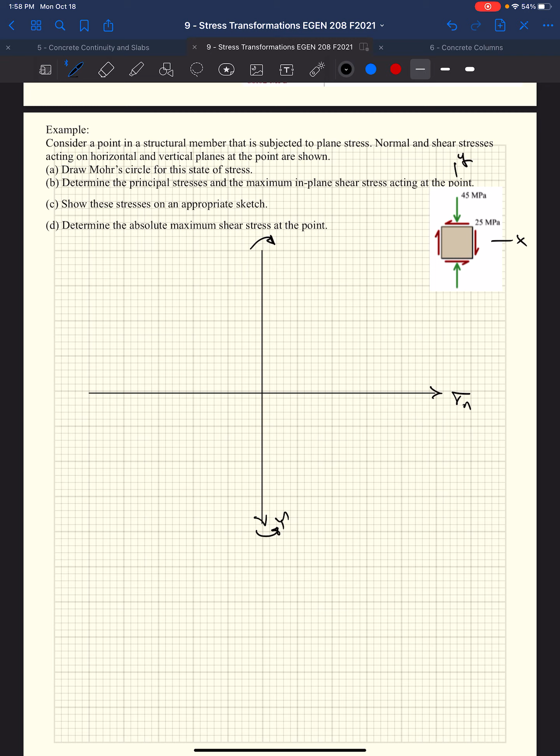Counterclockwise, clockwise, positive, normal stress, shear stress. In this case, we have our X face and our Y face for our stress state. 25 megapascals of shear, 45 megapascals on the Y face of compressive stress. We know already that our X point is going to be on the Y axis. So if we were to plot that point, we might be somewhere up here. This is 0, negative 25, because the shear stress on the X face is clockwise. We know we're going to be equal and opposite on the bottom end, but in this case, we're going to have a compressive stress of 45.

So I'm going to set this thing right here. I'm going to draw a line between them. I'm going to draw a circle around them. Something like that. So we have our X face, we plotted our Y face, same concept. For Y, we had negative 45 comma 25. That would be our coordinate based on the sign convention of Mohr's circle.

We know here, again, our absolute maximum shear stress is going to be the same as our in-plane maximum shear stress because this zero origin point lies within our circle. As mentioned, big players here are the center, which is our average stress. In this case, it's negative 22.5 megapascals. Radius, another big player. In this case, it's 33.63 megapascals. Center: we've got negative 22.5 comma 0.